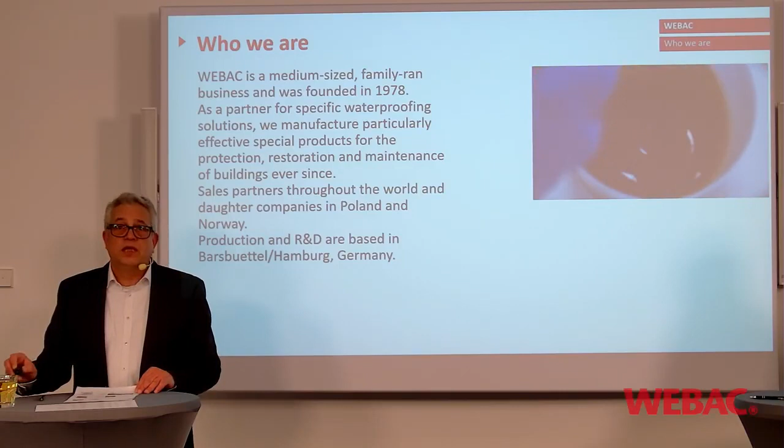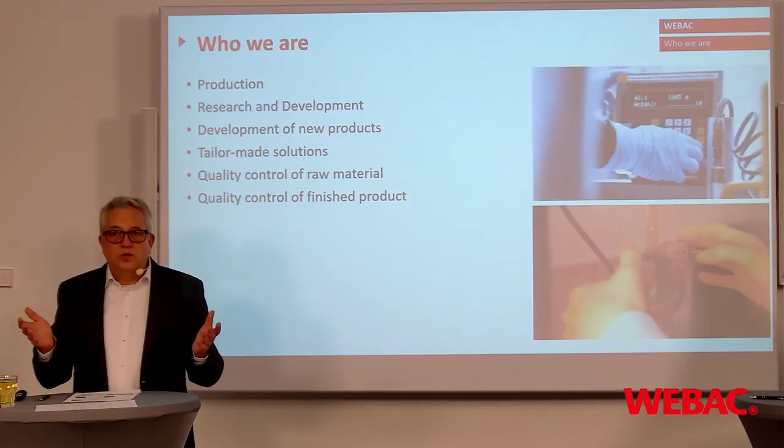WEBAC was founded in 1978. We are still a medium-sized family-run company. We are located here in Barsbüttel with our production and our research and development center. This is very important. As you know, you find different climate zones, so the short way into the laboratory is essential for us. We are here in our seminar room, which suddenly becomes a TV studio.

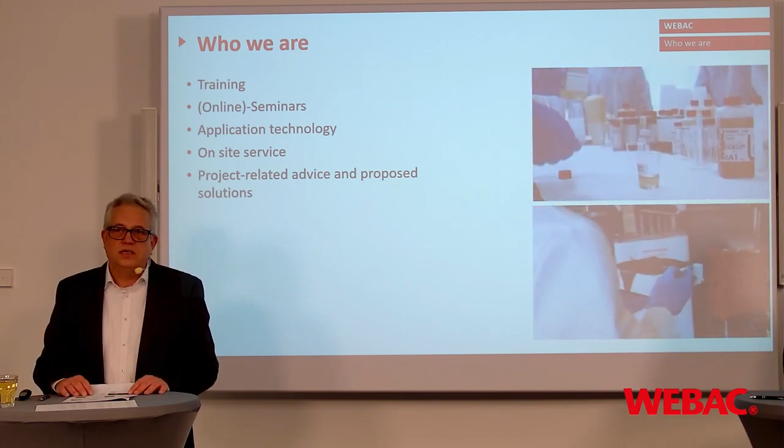Normally we give trainings here for designers, where the focus is on durability of the building. We give trainings for applicators. This is a little bit more hands-on training: how to drill, how to inject, what is the right injection pressure. But also for site managers: how can I control the injection works? What is in focus? What kind of material has to be used?

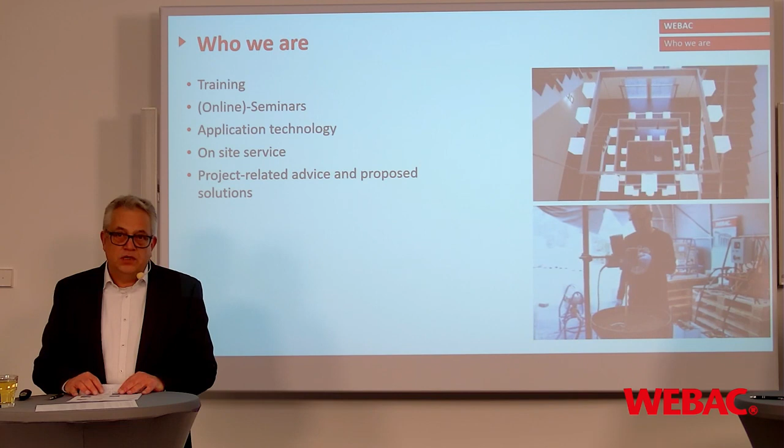Yes, we also provide a site service. So if you have questions, or if you have a building site where you are a little bit unsure what kind of material to use or how to apply it, give us a call and we are at your site.

Today, our live seminar is about the sealing and stabilization of concrete. Should it be force transmitting? Should it be simply waterproofing? Maurice will go more into the details. Yes, I do. So our seminar is scheduled once again for 30 to 35 minutes and it will contain the following topics: the principles of crack injection, the analysis, what kind of state of dampness is in your building, the objective of use, what kind of filling materials there are, what the difference between them is, and what the injection procedure looks like.

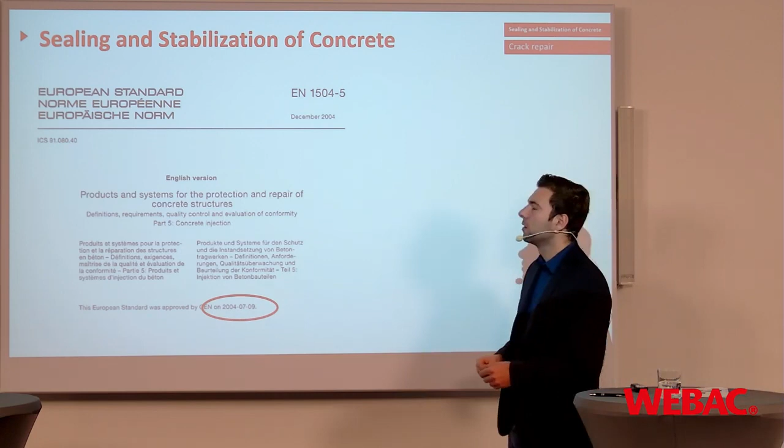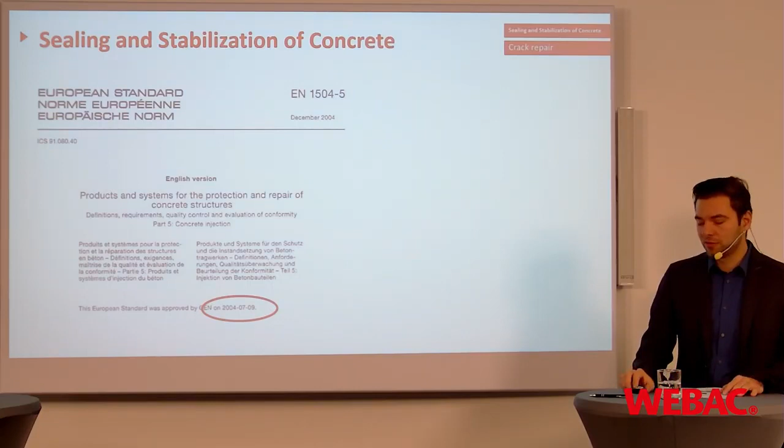As you can see here, we are talking about cracks simply in concrete. The reasons why the cracks occur and how they are treated are going to follow now. First of all, we would like to talk about the standard. There is a European norm which regulates crack injection in reinforced concrete. It is called EN 1504-5, highlighted here. The norm was harmonized back in 2004. Just to make sure what we are talking about, we have made a comparison from 2004 to 2021 with mobile phones.

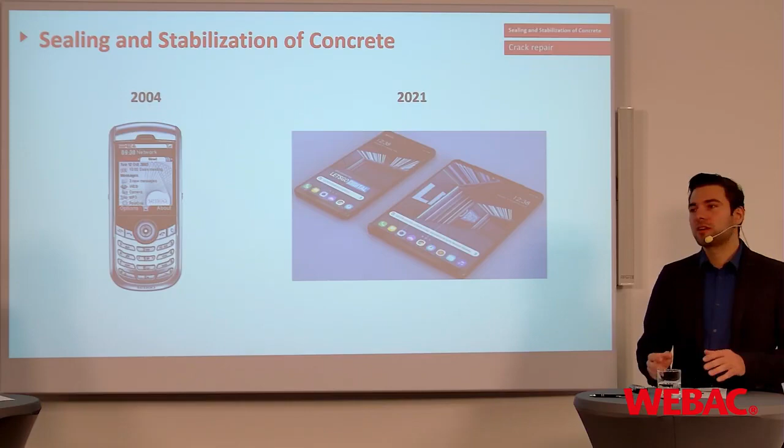Probably all of you know what the standard was in 2004 and how it looks today. And you can also apply that to the injection industry. The development of injection materials has been ongoing, and therefore there might be some products that are even better or that do not fit into the norm that was harmonized almost 20 years ago.

I think most of you have followed our presentations yesterday. Once again, it's very important to carry out an analysis prior to your injection. So first of all, we would like to talk about the reasons why cracks occur in concrete, and there are two main reasons. Some are related to the concrete properties, on the left-hand side, and the others are related to stress, on the right-hand side.

First of all, you probably know how concrete behaves during the reaction. There is hydration in the concrete. The concrete can shrink, or there is creep, or the concrete can even start to swell. So all these reasons related to the concrete properties can cause cracks in the concrete.

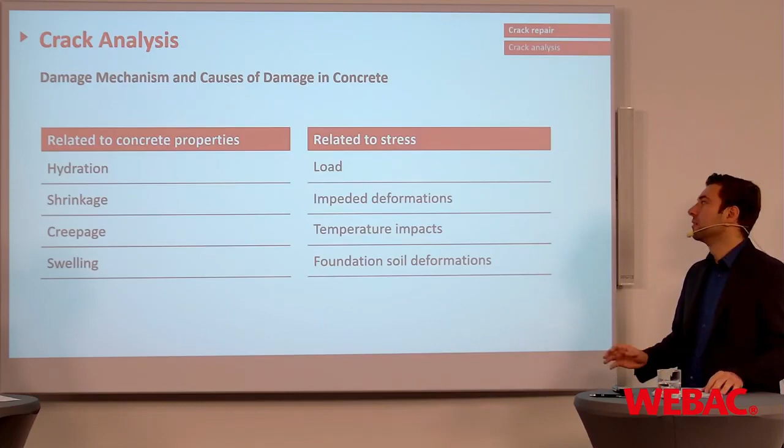The other causes are related to stress, which can be loads, deformations, temperature impacts, or deformations of your soil. What does that mean? If your building, for example, was designed for loads with forklifts of 5 tons, and after some time you see a change, that the forklifts are now 10 or 15 tons, for sure this is also going to have an influence on your structure, on your concrete.

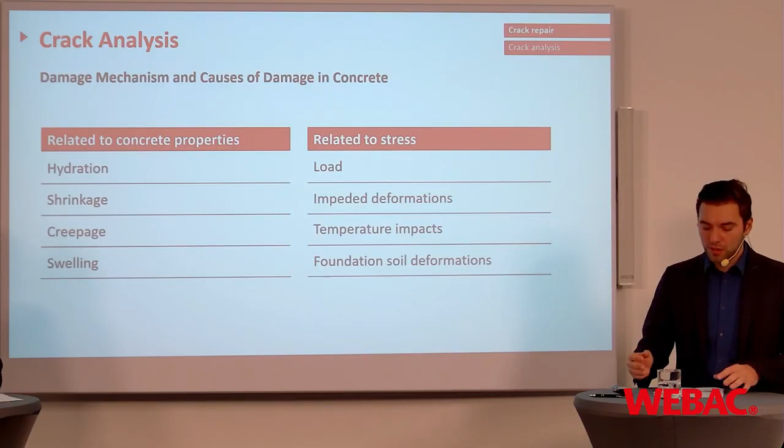So unexpected loads on the concrete can cause cracks. Temperature impacts, the difference between summer and winter times with big changes in temperature, or deformations in soil, like washed out soil underneath your structure causing settlements, these settlements for sure can also cause cracks in your structure.

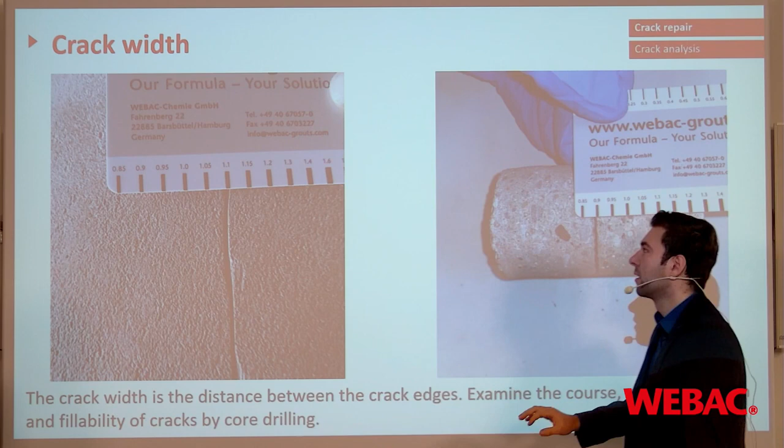It is very important to measure the crack widths prior to the injection, and there are two ways of doing it. You can simply measure with a crack scale the width of your crack on the surface. The other option, which is not more complicated but requires further work, is to take out a core drilling. This core drilling for sure gives you a better feeling and understanding of how the crack is going in your structure.

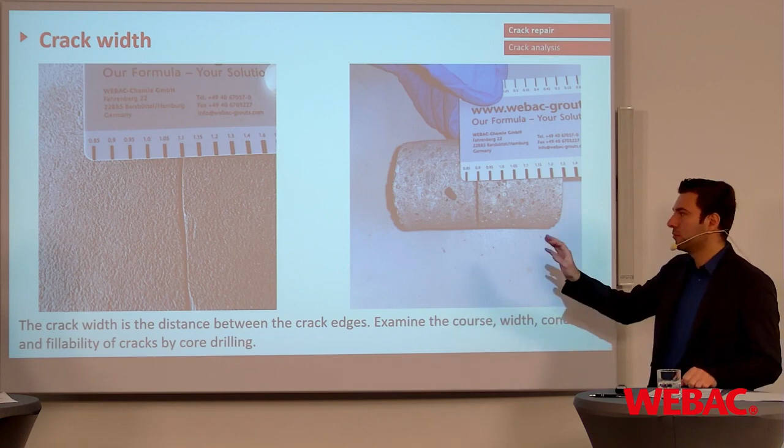Is there any change in the crack width? Is it smaller, thinner, or wider? Is it an even crack in the concrete? Are there pathways? These are things you cannot see from the surface, and therefore you would have to take out the core drilling.

Also, as you can imagine, there can be crack width changes, and depending on the changes, you need to see when the best time is to inject the crack.

The most common or most known area where you can see this is the bridge deck. You have the expansion joints, and in summer when it's warmer, the concrete is a bit wider and the expansion joint is smaller than in winter when the concrete is cold and shrinking once again. So the expansion joint is always a good indication of crack width changes, and you have to keep these changes in mind when you carry out the injection.

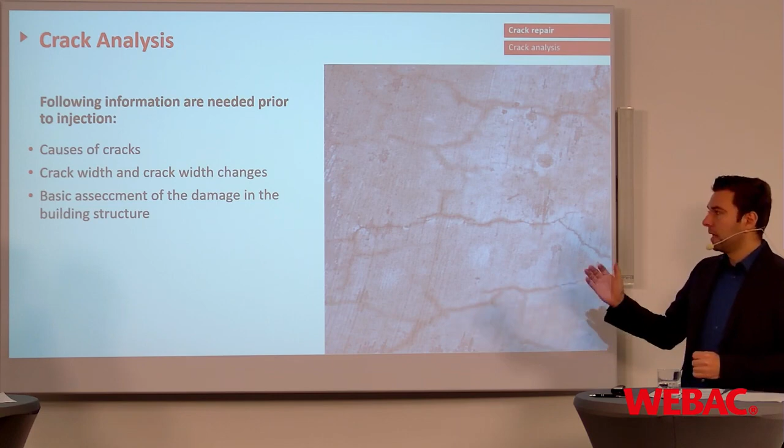So just to summarize what we've been talking about, before you carry out the injection you would need to know the cause of the crack. Why do I have a crack or cracks in my building? Then, for sure, the widths and the changes of the width, and also if there are further damages in your building.

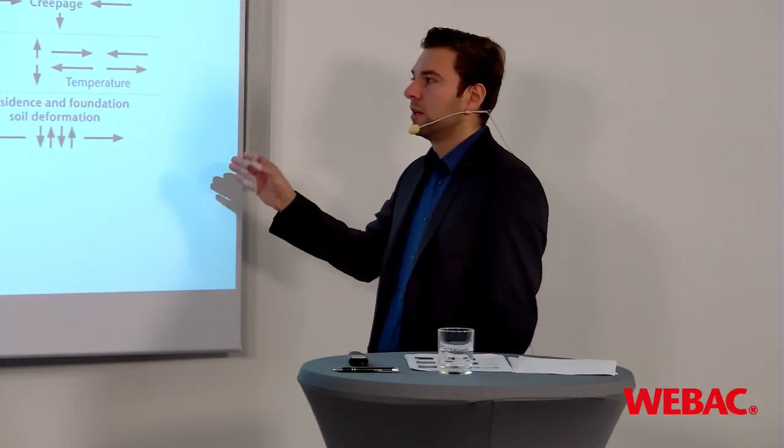There is going to be an overview of what kind of things go into the concrete repair work. So we are talking about construction joints in your basement.

Depending on the concrete quality, there can also be gravel nests or just cracks. Once again, at the connection between the bottom slab and wall, the construction joint, especially when we are talking about basements, if you're below groundwater level, you can have the influence of water. Or if you're above groundwater level, then we're probably talking about dry cracks here.

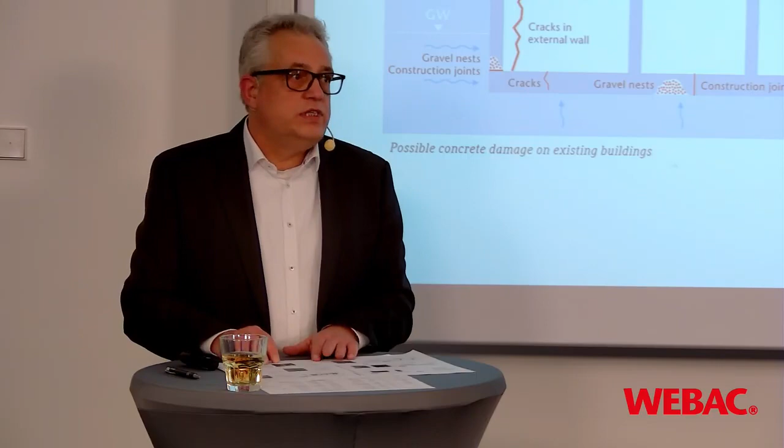There the point is also, due to the shrinking of the concrete, you will mostly receive separation cracks in the wall. These separation cracks go through your whole concrete, meaning the reinforcement is also exposed to water, and this can cause corrosion of the reinforcement. For the lifetime of the building, this is a big issue.

So regarding shrinkage, it is in the interest of the contractor, when he pours the concrete, not to use a lot of crack inducers. These are the most common cracks which have to be treated.

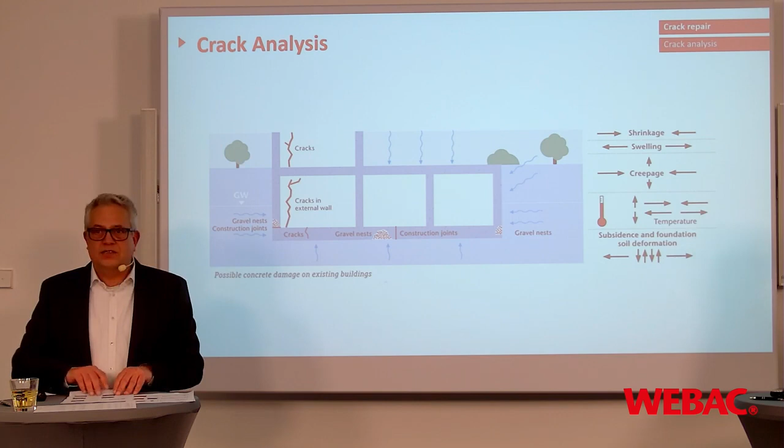Let's talk a little bit about the state of dampness. You mentioned there are different states of dampness above groundwater level and below groundwater level, and you have to treat them differently. So, state of dampness - everybody knows what a dry crack is.

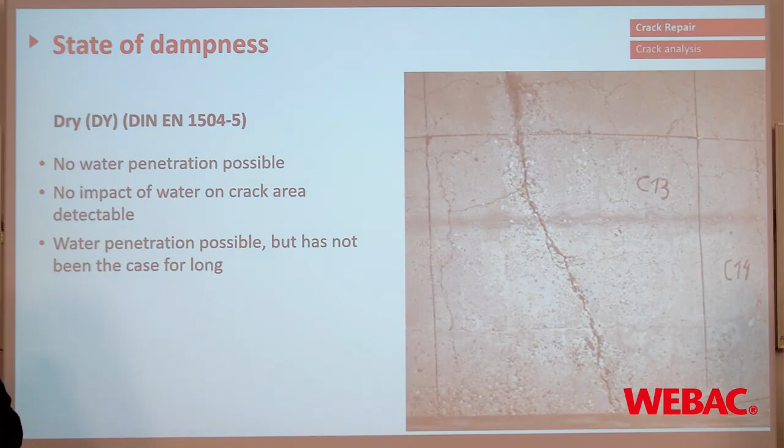Here in the crack you see no water penetration. The definition in the norm is a little funny for me: water penetration is possible, but has not been the case for a long time. How can you measure this? I always think of an engineer sitting in a chair in front of the crack observing it. But in my world, a dry crack is a dry crack.

Then you find damp cracks. All of us have seen it, where you see some shadows. In this case, cracks close to the surface. Here's a smaller one, but here you also see penetration of water along the reinforcement.

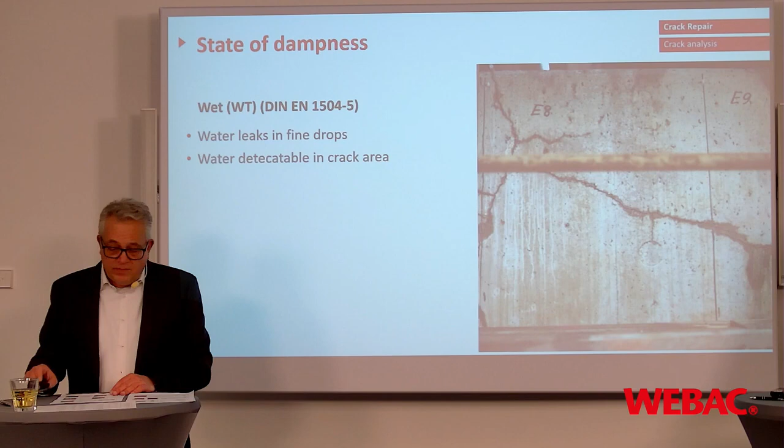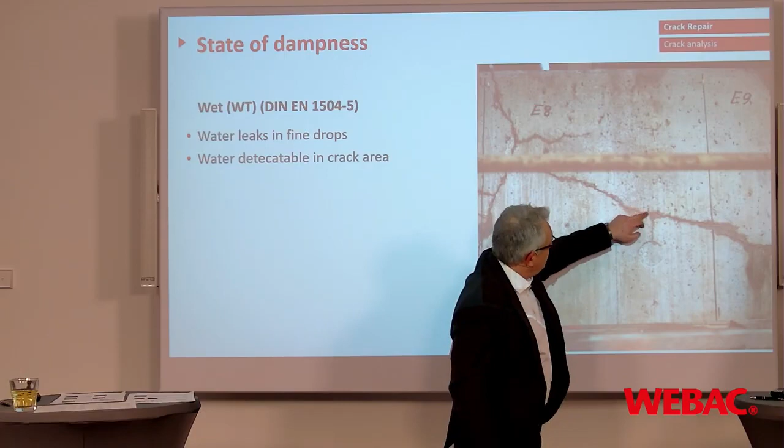Then wet cracks - you see here. There you find water in a liquid state, and also here you see some finer drops coming out of the crack. So this is the definition of a wet crack.

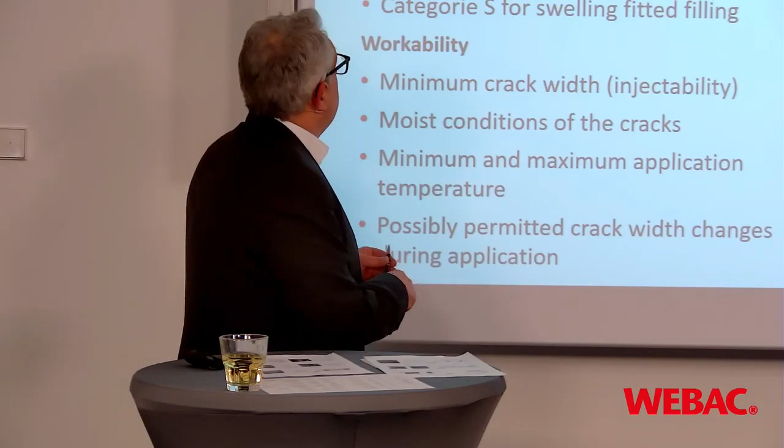These cases have to be analyzed, and according to this we choose the filling material. The definition in EN 1504-5 makes the difference between performance and workability. The performance is simply: what would you like to achieve? Would you like to glue the concrete together again? This means a force-transmitting filling, category F, for structural bonding.

Then the ductile filling of the crack - you will come later to the point of the material. This material is a little more flexible and can take some movements. And last but not least, category S, there we are talking about acrylic gels, mostly for swelling-fitted filling, meaning the material swells a little, and due to the swelling pressure the crack gets sealed.

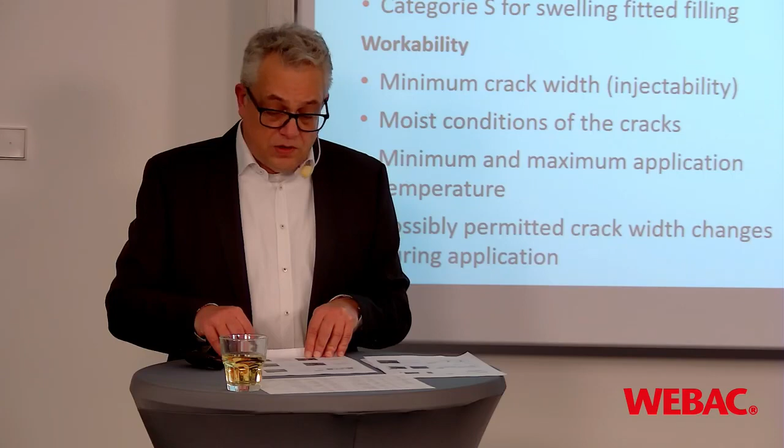On the workability side, as you mentioned, it's important to know the crack width. You cannot inject a crack with 0.001 millimeter - that's simply not possible, but it will be dry anyway, so there's no need to. You have to take into consideration the minimum and maximum temperature, and also the crack width change during the injection.

Okay Maurice, now it's your turn with a comparison of impregnation and injection.

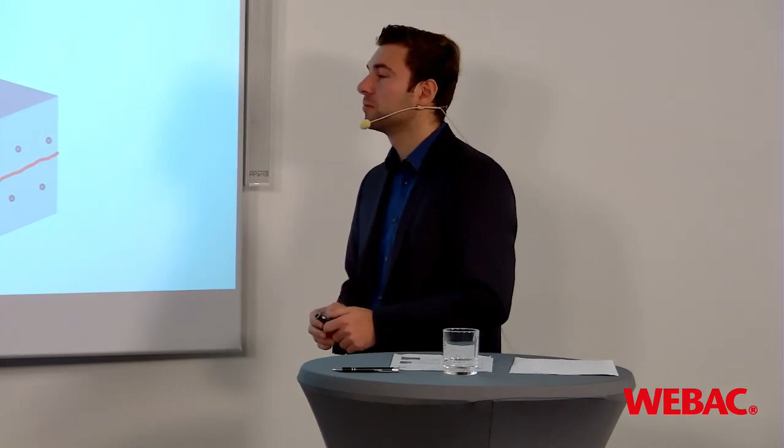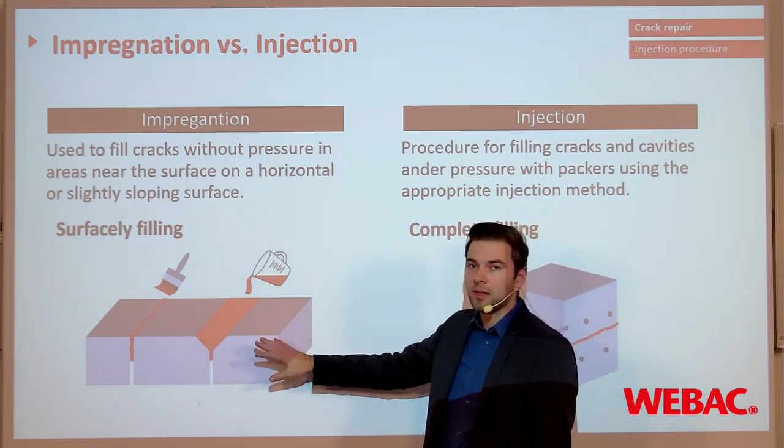So usually there are two ways to seal cracks in concrete. First of all, the impregnation - as you can see, the impregnation is something that goes into the structure by gravity, so you just pour the injection material into the crack or brush it in. As you can see, the filling grade is not that good, so it's only a surface-level filling.

In comparison, there is the injection, meaning we work with drilling and placing packers, using high pressure injection pumps, and therefore the filling grade inside the structure, inside the crack of your concrete, is higher. This is usually the target of injection - to achieve a high, up to complete, filling of the crack. But in some cases the impregnation might be enough, and now there is going to follow an application video showing you the steps of the impregnation.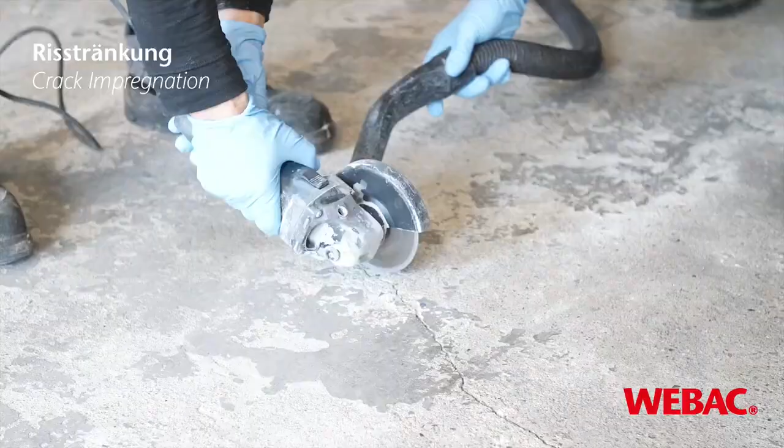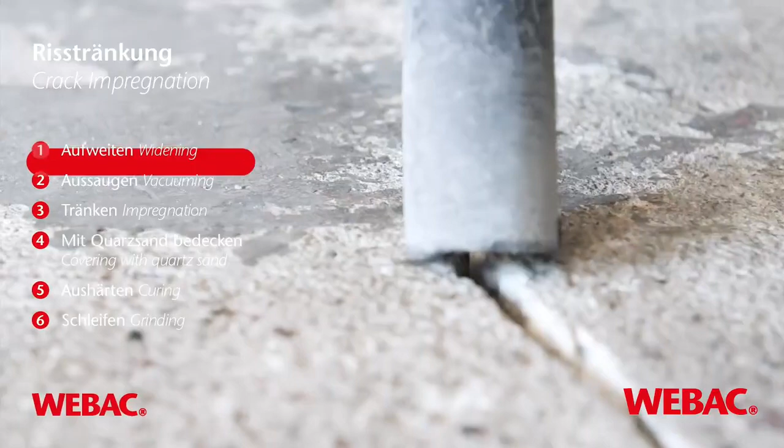As you can see, first of all you have to make sure the crack is wide enough, so you use a grinder just to widen the crack, and afterwards you suck the drill dust out of the crack so that the injection resin is able to penetrate into it.

Now we are going to show you the mixing. Most of our products are two-component based, so you have to mix both components prior to application. Mixing ratio can differ, so you need to make sure you mix the product in the right ratio. As you can see here, the guys are using an epoxy resin. It's very important to repot the injection material, because you need to achieve a very good mixture - this is happening now.

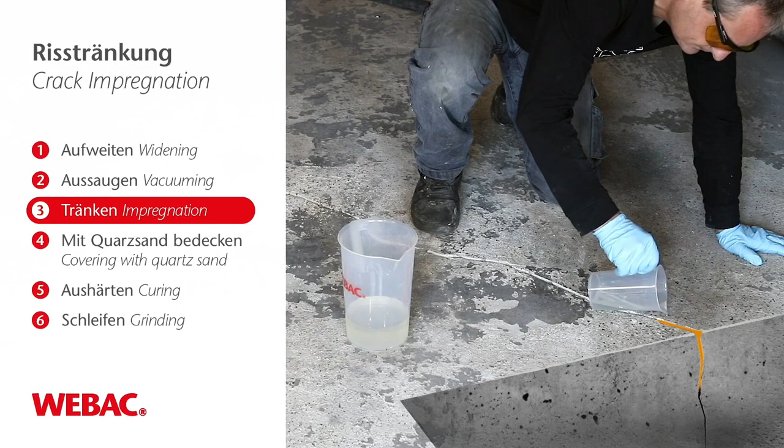Now they are refilling it into a smaller measuring cup that makes it easier to fill into the crack, and they are going to fill it up now. As you can see, the material is going into the structure by gravity. The colleague is pouring in the material and it just sinks down. This step has to be done a couple of times, because the injection material is going to penetrate into the concrete, find fissures, cavities and so on. So material is gone and you have to repeat the step of filling until the crack is filled up to the surface.

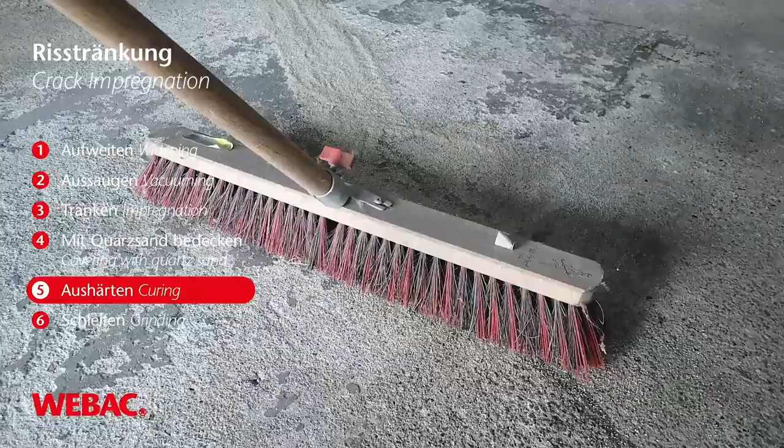Once you achieve the filling grade to the surface, you can just apply some quartz sand to smoothen the surface. And after curing, which is going to follow in a couple of hours, so the material needs some time for reaction, and after it's cured, you just brush off the quartz sand, and afterwards you can grind the surface again to make it smooth, and afterwards you can start to apply, for example, a coating system.

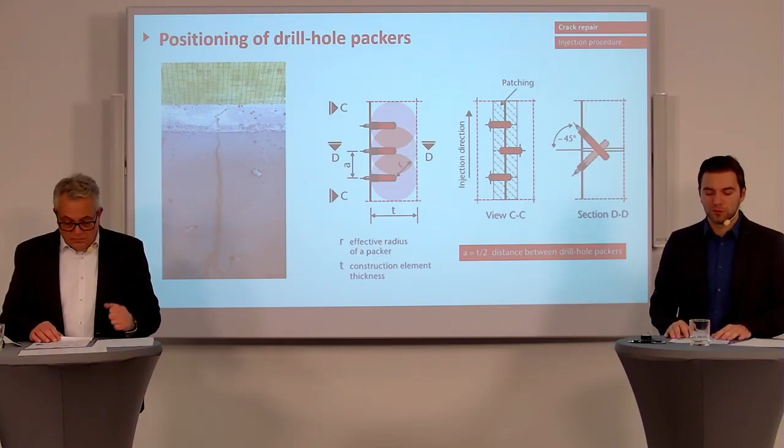So that was the crack impregnation, and I would now like to hand over to Markus, who's going to talk about the injection and how to do it. Perfect. Thank you, Maurice.

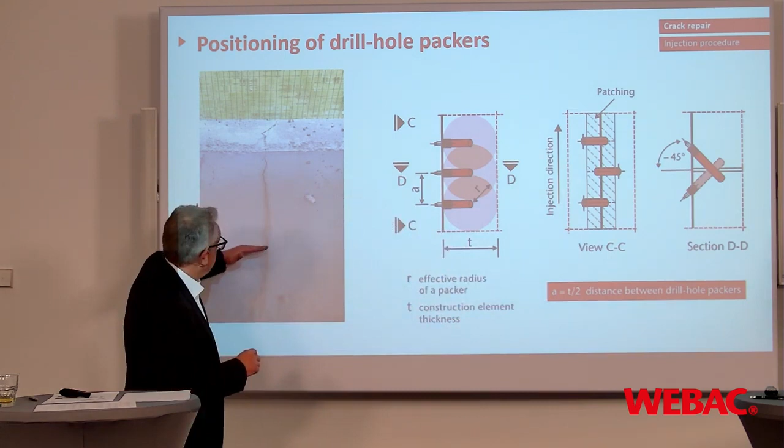In comparison to the impregnation, we find the pressurized injection with drill hole packers. So you find in the standard and norms, or we often get the question, what should be the distance between the packers? So the distance between the packers should be roughly half of the construction thickness.

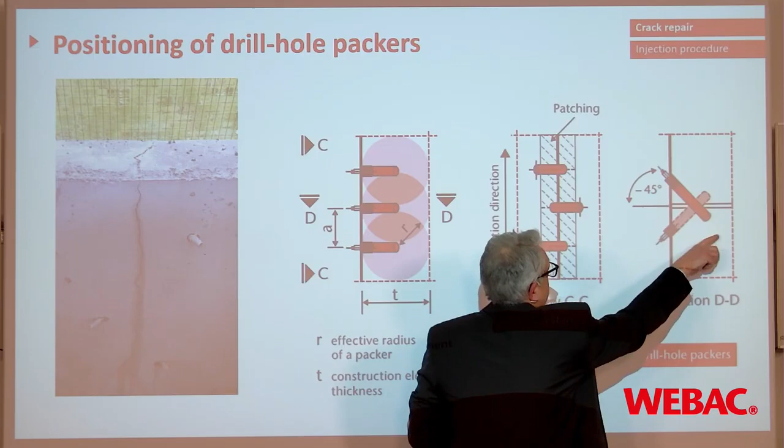We should always inject from the lower part to the upper part. That's very important. And we should drill into the concrete with an angle of 45 degrees. I hope you can see this picture here. The reason is that if you are standing in front of the crack, you will never know how this crack went in the construction. In this case, it goes to the right side. And with this angle of 45 degrees, you ensure that you intersect the crack. That is the reason for the angle of 45 degrees.

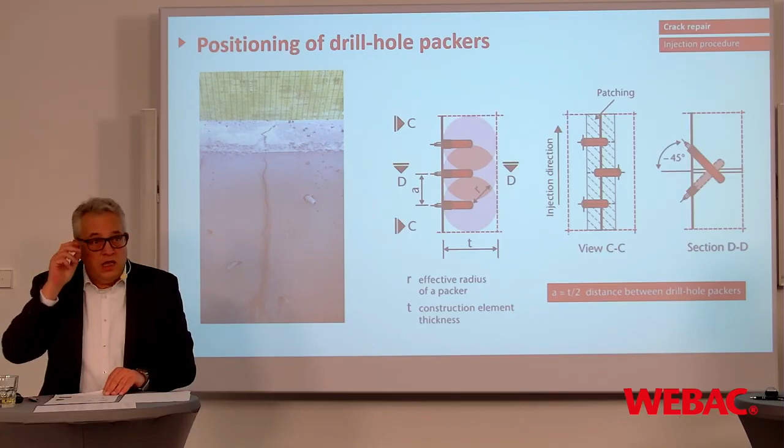So, distance, in general, you can say half of the construction thickness. If you now have a slab which is 1.80 meters, you will probably not drill 90 centimeters into the concrete, but this has to be seen case by case.

Always a question, and opinions there in Europe, or worldwide, are totally different. For example, in the north of Europe, they simply say, okay, I inject with a lot of pressure because then the material gets a better flow, and I widen the construction joints a little bit so material can flow in better.

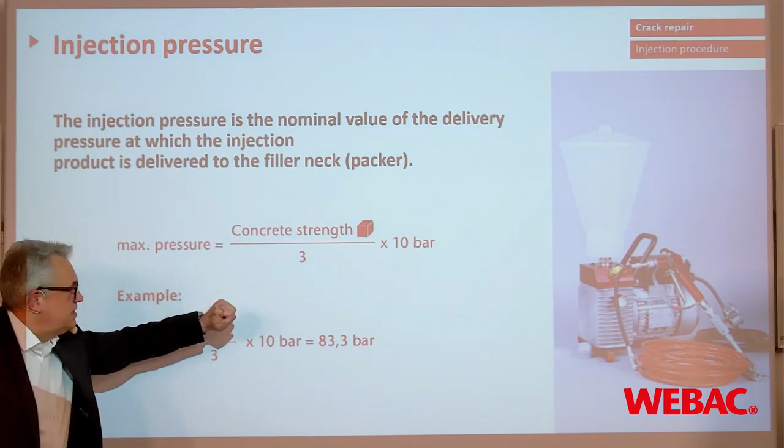We say, and this comes simply out of our experience, lower injection pressure over a long injection time gives the best results. A rule of thumb is to reduce the maximum pressure like this: the cube concrete strength divided by 3, times 10 bars. So for C20/25, it should be not more than 80 bars. And 80 bars is an 800-meter water column. In my world, that's a lot.

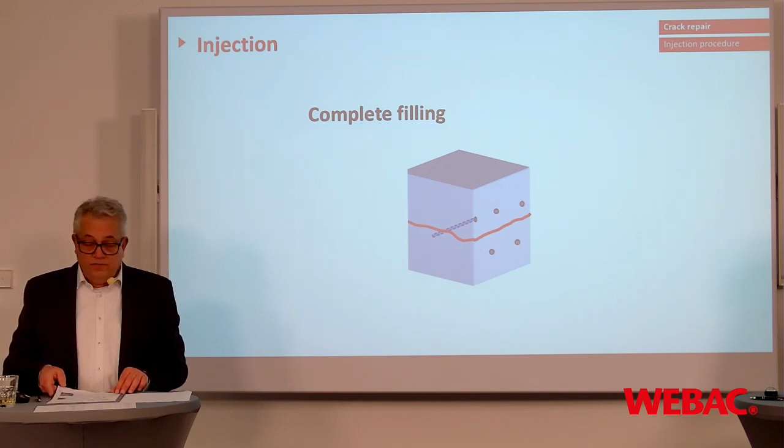Again, this is general speaking. It depends on the case and on the building site. So how this works now, we have prepared a small video, let's take a look at this. So here we see a wet crack, I would say. Drops are coming out of the crack.

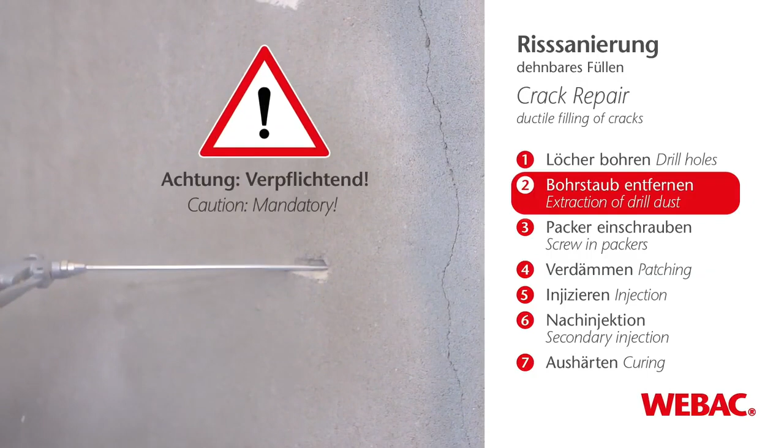First of all, you mark your drill holes at the distance we discussed. Then you are drilling, you can see it here very good, in this angle, to hit the middle of the construction. Very important to remove the drill dust, because that's quite easy to understand. If you are pressing the drill dust with the injection material into the crack, then you block it and the injection process will not be so easy.

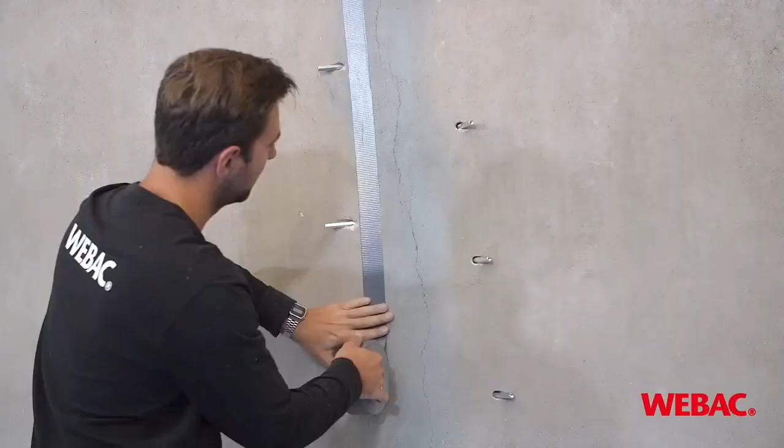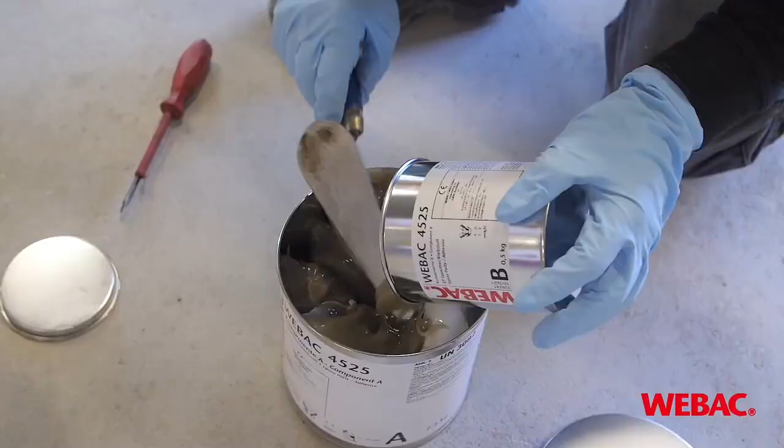Afterwards, you are installing the packers and patch the crack, simply to prevent that material which you are injecting in the packer from coming out immediately to the inside of the building. You would like to push the material, we have seen it in the earlier graphics, to the outside of the building. Very important, at the top of the crack, leave a venting opening.

In this case, we are using polyurethane injection resin for the ductile filling of the crack, so it can take some movements.

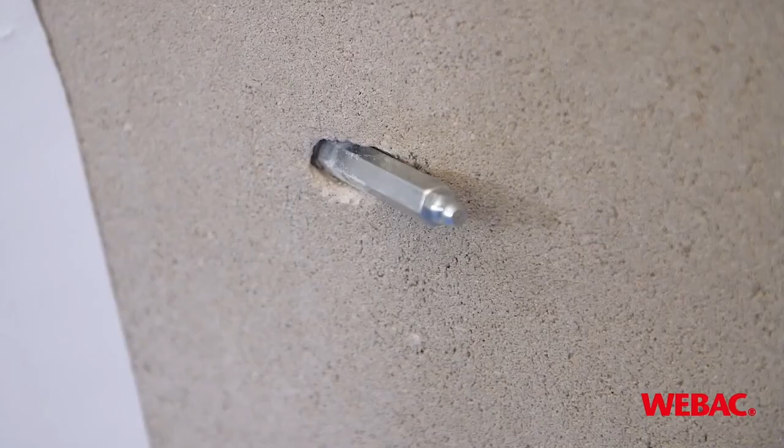Material is mixed, filled into the pump. And then the injection process starts. Again, always from the lower part to the upper part, and you have seen it in the video. Sometimes water which is in the crack is coming out of the next packer, and you are injecting for a longer time, and if you have filled the complete crack, you see the material is coming out

at the top. Very important is a secondary injection, because due to gravity, the material gets sucked into the finest fissures, and if you are injecting from the bottom to the top, this re-injection is essential. Removing the patching, and make the surface nice and even again. Okay.

Summarize. During the injection, it is very important to observe the pressure range. Always inject from bottom to top. Don't forget the venting opening, and a secondary injection within the pot life is essential for good work. And then dismount the packers, close the drill holes, and you are done. You are ready. So, Maurice, I would like to hand over to you.

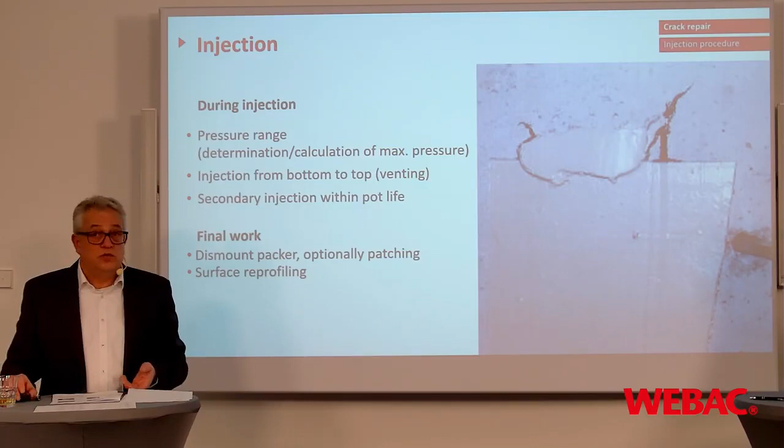You can tell us something about the different kinds of material classes. Yes. So last but not least, before we come to your questions, we will now have a short overview of different kinds of injection materials and what they are used for. So we are now going to start with our PU injection foams. As you can see, I just let the video run. In the meantime, you can see that our employee has started to mix a product.

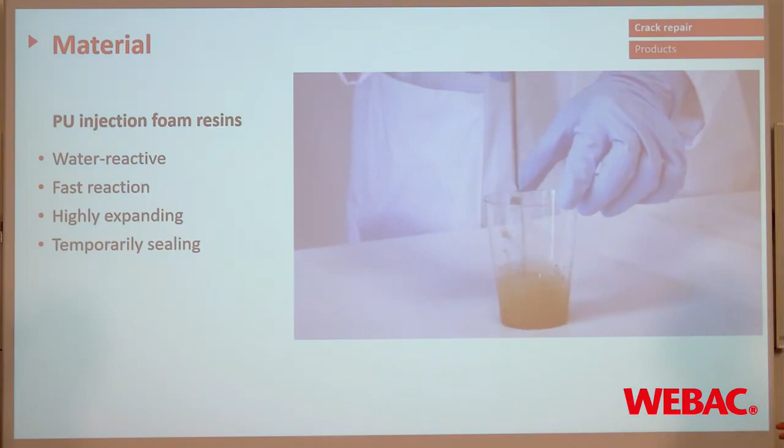So the PU foams are water reactive. They will not work on a dry surface. They are only designed to stop very high water income. Coming back to the state of dampness, this would be the option for pressurized water. So they are water reactive, very fast reacting. They start after some seconds, highly expanding.

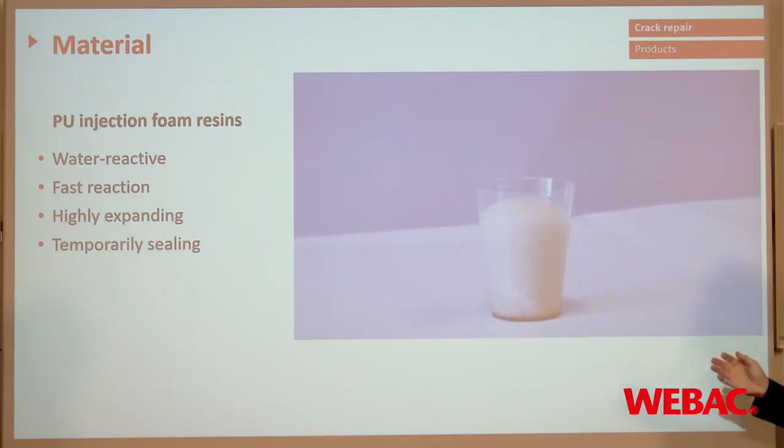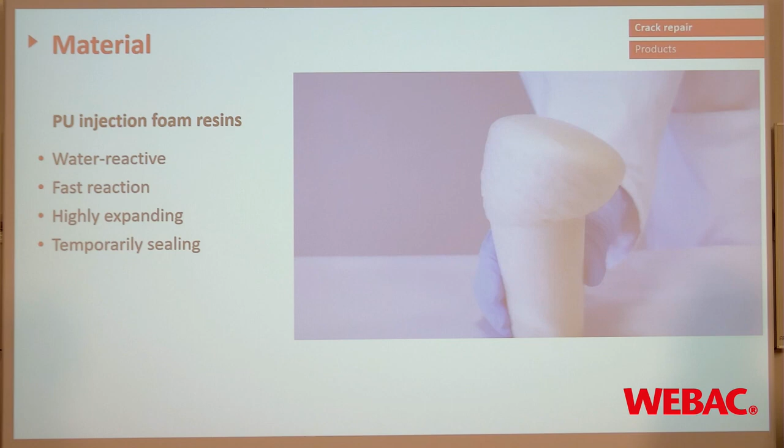Due to these properties, the high expansion, there is a lot of CO2 inside the foam structure, meaning you have small bubbles within the foam structure. In this foam structure, there might be the possibility of water penetration after a certain time. So therefore, it is only a temporary sealing, meaning you would have to carry out another injection with another material type to make it a long-lasting sealing.

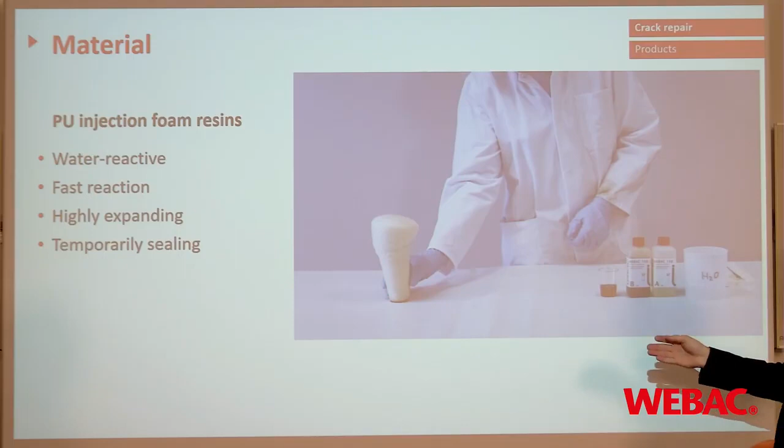Maybe you have seen it in the meantime. It was a small amount of material, just some drops of water, and the expansion is up to 40 times. So it's very fast reacting, highly expanding. And as you can see, you have an even foam structure here.

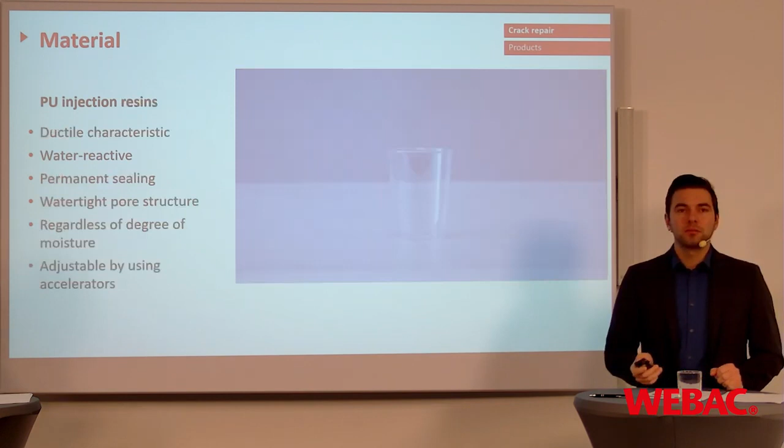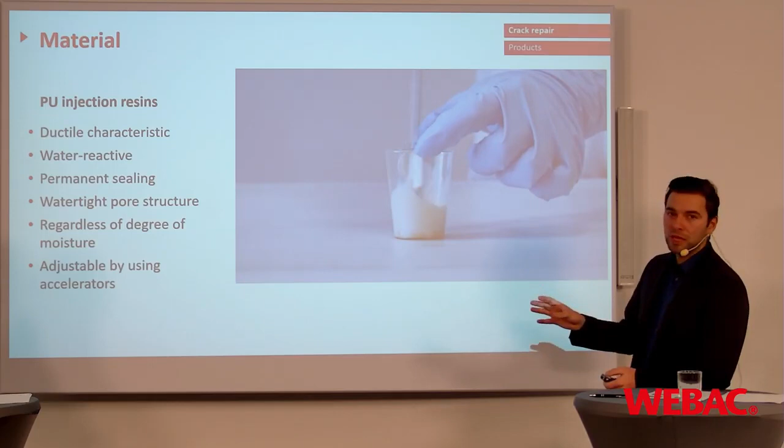Now, coming to the next injection material, we are talking about the PU injection resins. They are designed for the ductile filling of cracks, and they can be used in dry, damp, and wet cracks. So they are very flexible, meaning they are designed for the ductile filling of cracks. Also water reactive, so if they get in contact with water, like you can see in the video, this material also starts to foam.

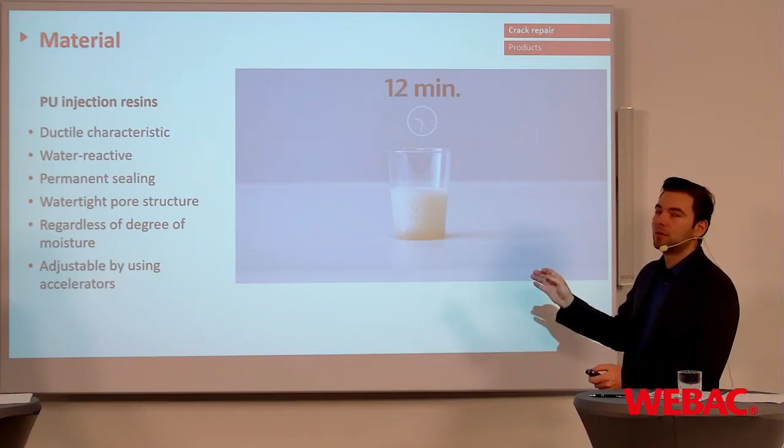But as you can see, we just put it on a time lapse. It's not seconds, we are talking about minutes. Depending on the material, it can be between 10 to 30, 40 minutes. This material and also the foam structure is designed for a permanent sealing because they have a watertight pore structure. So if you put the foam underneath the microscope, you can see that there are not too many bubbles, and you have a

watertight structure. So if you're injecting a PU resin like this, the crack is filled and you have a long-lasting sealing. As mentioned before, regardless of the degree of moisture, so dry, damp or wet, and for sure you can adjust the reaction time by using accelerators. Especially now in winter times, there might be the need to speed up the reaction.

The epoxy injection resins have a high compressive strength, a high bending and tensile strength. They are tough and solid, and they have a very good adhesion to concrete edges. So therefore, due to the high mechanical properties, the epoxy injection resins are designed for the force-transmitting filling, meaning you glue the broken concrete parts together and give back the strength.

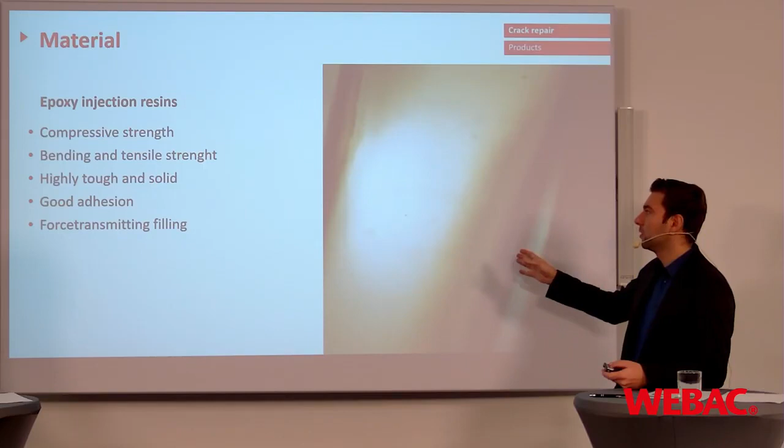The mechanical properties, the compressive strength of these materials are higher than standard concrete. So we are talking about a strength of 40 newtons per square millimeter or even higher.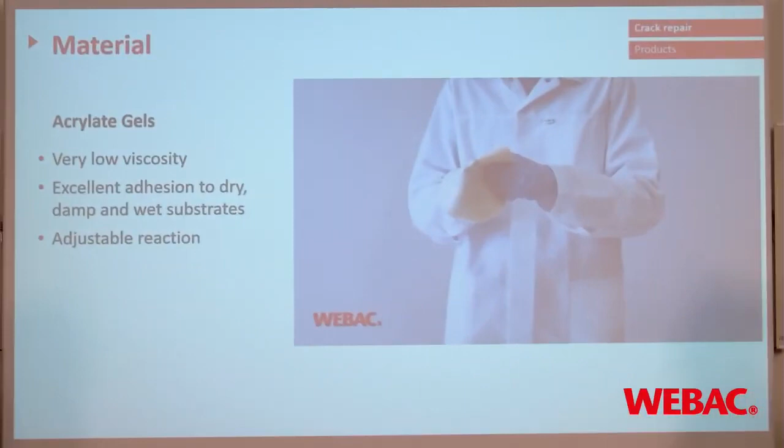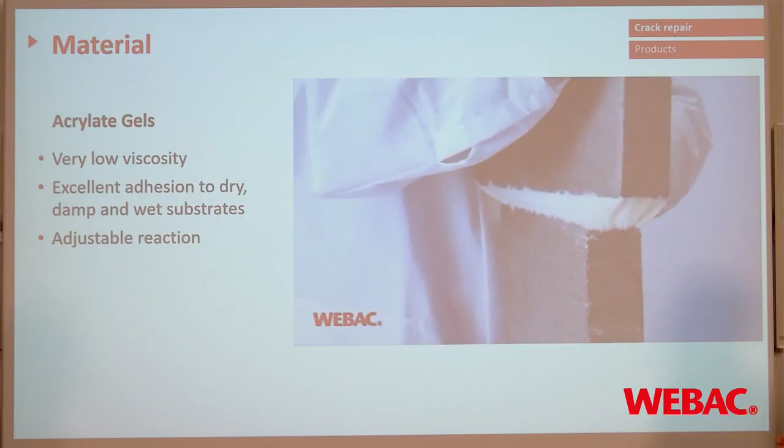And finally, the swellable fitted fillings are the acrylate gels. As you can see in the video, they have a very, very low viscosity, meaning it's more or less comparable to water. They also have a very good adhesion to dry, damp and wet substrates, and the reaction time can easily be adjusted by the amount of component B, the initiator of that product.

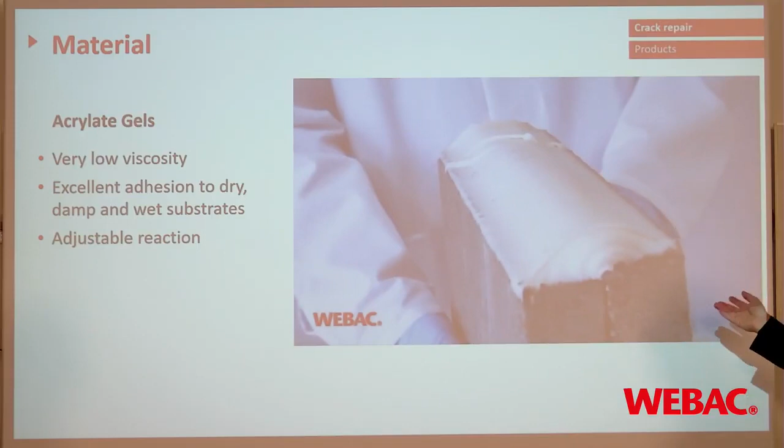As you can see in the video, they have a very high elasticity and a very good adhesion to the concrete. So if you would have a case like that, that your building is having movements like that, just get out of the building and run away. Then you don't have any problems with the waterproofing, so there you have bigger problems.

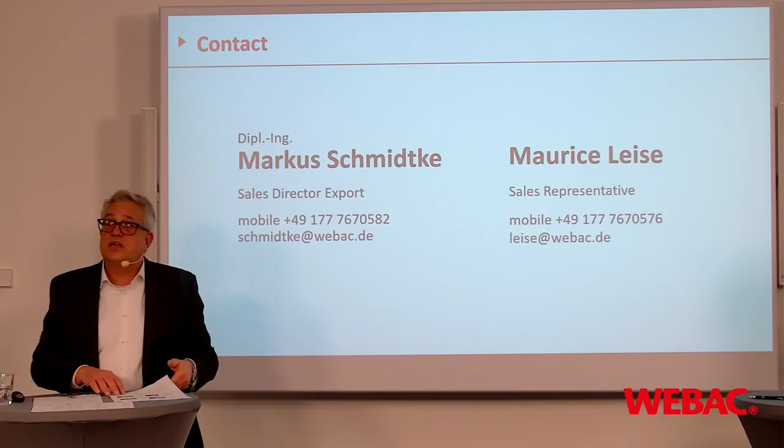So, if you then carry out a secondary injection, start at the lowest point within the pot life, and you see immediately material is coming out at the top or at the venting opening, then you have done a good job. Most injections are failing because the guys didn't carry out a secondary injection.

Thank you, Markus, for that explanation. So I have another question for Maurice. There's a question about the patching. We saw it in the video, but is it necessary? What is the purpose behind that? And does it depend on the material type, or what do you say about this?

Yes. So a patching is not always required. For example, as we have seen in the video, we were talking about a wet crack, and in most cases, wet cracks are just injected without a patching. A patching is of course necessary when you work overhead, just to prevent the material from coming out immediately out of the crack, so you patch the crack prior to injection.

Another case where we always recommend to use the patching is for a force transmitting filling if we are working with epoxies, because there it's very important to achieve a high filling rate. According to the standard here in Europe, you need to achieve a filling rate of at least 95% to have a successful injection, and therefore, to prevent the material from coming out too easily and so that it stays inside your construction, for a force transmitting filling we always recommend to use the patching.